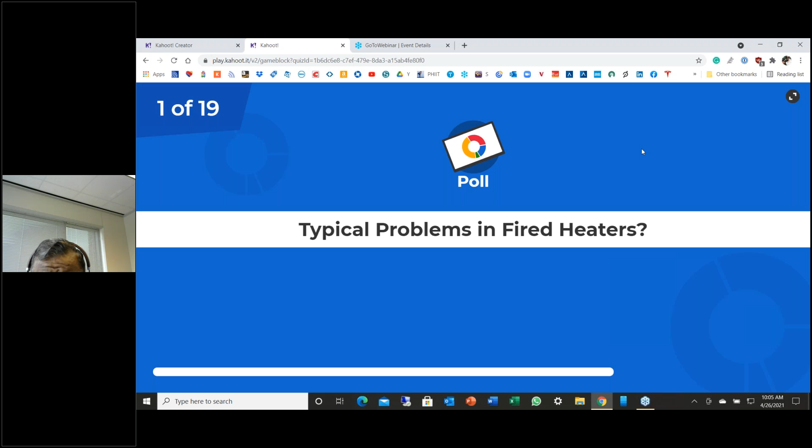So what we want to do is we want to start, and my first question is a poll question for you. What are the typical problems in fired heaters? On your phone, you can select one which you think is the most important problem or the most pressing problem, or what you have experienced in your time. You can write it down, you can click it.

I only had 4 selections available here. I think we have another slide for 4 more problems. But what we want is, let's identify the problems. Let's hear from the end users. Let's find out what they think are the problems rather than my telling these are the problems. So please, on your phone, select one of the 4 answers, and that way we will know what are the pressing problems in fired heaters.

It could be positive pressure at arch. You could be worried about high flue gas temperature in stack. I can tell you so many of my colleagues in India, because of the high fuel gas cost or high energy cost, are really worried about flue gas temperature leaving the stack, and they want to cool it down almost to ambient if it's possible. So we will discuss that as well.

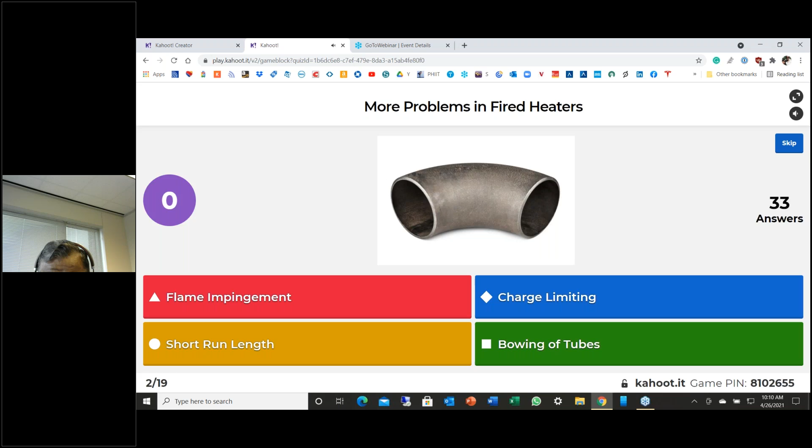So 67% think flame impingement is a big problem, and I agree very much with them, because we also feel flame impingement has been exacerbated ever since we got the low NOx burners, with double or triple the flame length. Flame impingement problems have been experienced in a number of heaters. And then short run length, that's another, I think maybe a direct relation coming from flame impingement. So thank you again, good response.

So where do we use fired heaters? Given a choice, I think process engineers won't even like to put a fired heater. I mean, they may want to use a heat exchanger or something similar. So let's find out where fired heaters are being used.

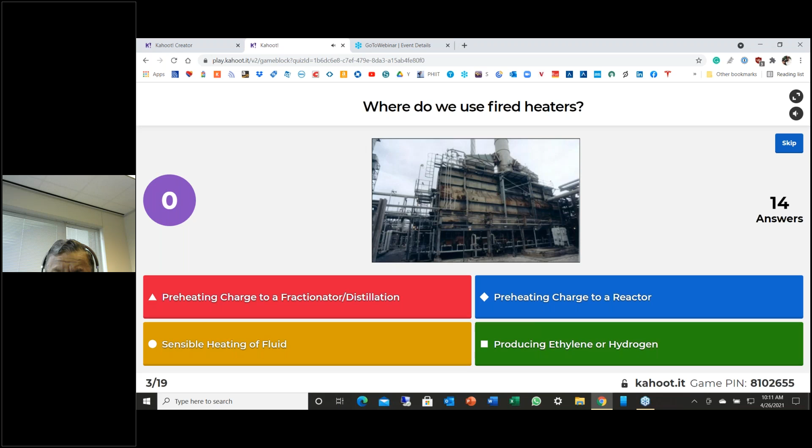About 50% of applications are in preheating charge to a distillation column, maybe like a crude column or vacuum column. Some places it could be preheating charge to a reactor like a hydrotreater or hydrocracker. Some could be sensible heating of fluid, like a hot oil heater. And then the other application is producing ethylene or hydrogen.

I'm happy there are 3 people who have ethylene applications.

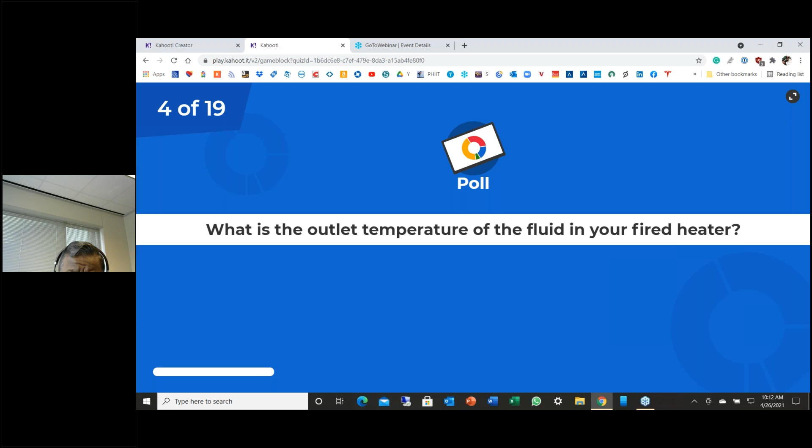If you have a fired heater, let me know what is the outlet temperature of the fluid in your fired heater. To what temperature do you heat it? It appears I've only given 30 seconds, so you need to act quick. Maybe next time I can add more time, but since we have limited time, I'll go with this.

Most heaters heat the fluid to about 600 to 800 degrees F, typically. There are some heaters, maybe coker heaters or platformer heaters, where we go up to 1000 degrees. Less than 600 are typically hot oil heaters or maybe reboilers. And the 1400 to 1600 range is in steam methane reformers or ethylene crackers - those are specialized settings. So you can see we have applications of fired heaters with different outlet temperatures.

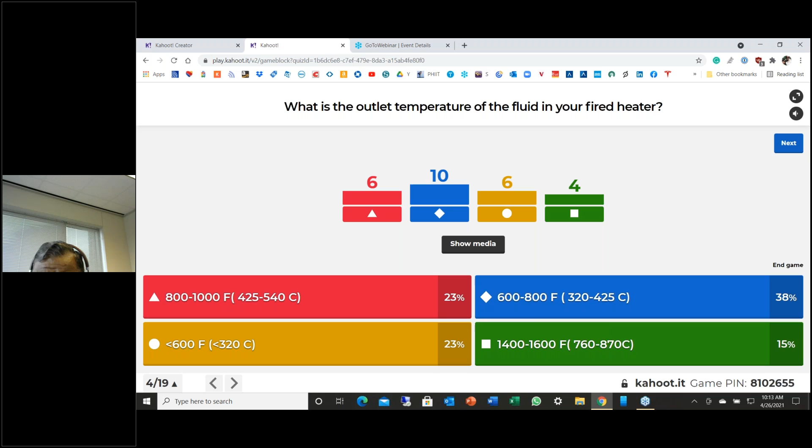So my question here is, can you achieve 900 degrees outlet fluid temperature using steam or hot oil? Is it true or false?

I think it's very important to understand that process engineers use heat exchangers as their first choice. In heat exchangers, you can have steam heating or hot oil heating. But after 600 or 700 degrees temperature, the hot oil starts coking up and the steam pressure keeps going up. To achieve 900 degrees, the fluid has to be at least about 1000 degrees so that we can have the approach. So that is one reason we find that heat exchangers cannot be used in place of fired heaters.

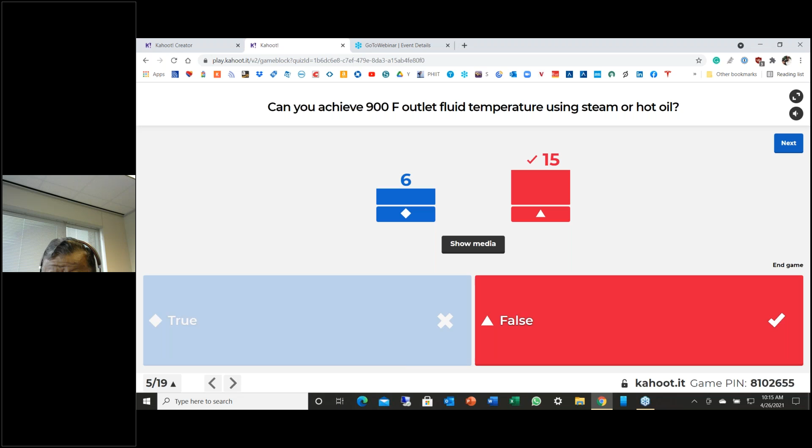So just to give you a picture on the refining industry in the US, we are in survival mode. The number of refineries has been coming down. 40 years ago, there were more than 300 refineries in this country. Today we have only 120 refineries operating. The good news is the refining capacity in the US has more or less remained steady or even gone up - that means existing refineries are being revamped every 5, 7, 10 years to increase capacity.

My guess is there are approximately 2,200 heaters in the US, out of which 90% of the heaters are natural draft. 8% of the heaters are forced draft, and only 3% of heaters have an air preheater.

This picture is very different when you go to Asia. There, because of high fuel gas cost, 90% of heaters are balanced draft, or 85% of heaters are balanced draft with an air preheating system, because the fuel gas cost is very, very high. Average size of a heater in the industry is about 72 million BTUs. The forced draft or balanced draft heaters tend to be bigger, at about 110 million BTUs. So that is the picture.

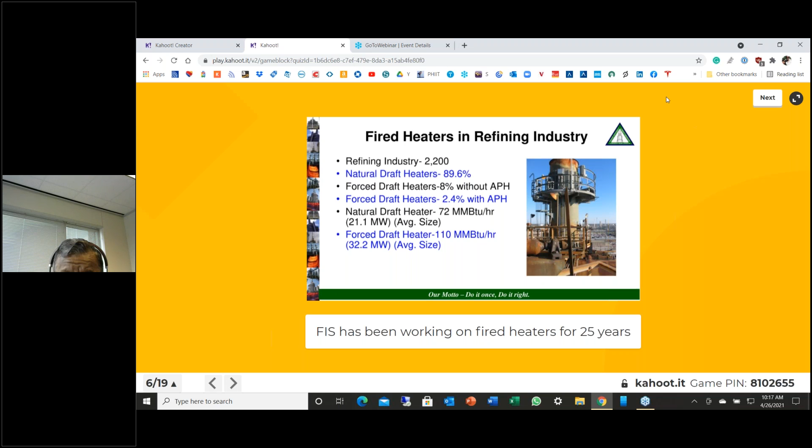Fired heaters are nothing but large heat exchangers. They are used for high temperature heat transfer. The energy for heat transfer comes from the combustion of fuel, and radiation heat transfer plays a very significant role. We will talk about many variations of fired heaters: single fired, double fired, top supported, bottom supported, vertical and horizontal tubes. So we will talk all about that.

So here's a guess for you to take. What is the temperature of the flames? I'm looking for the adiabatic temperature before it gives out the heat.

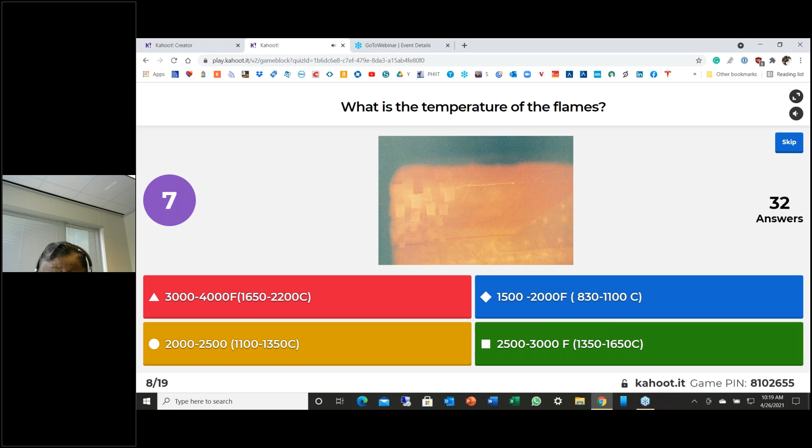So some people think, most people think the flame temperature is in the range of 1500 to 2000, or 2000 to 2500, or 2500 to 3000. The real temperature of the flame before it gives out the heat is in the range of 3000 to 4000 degrees F, or 1650 to 2200 degrees C. So you can see the flames are really, really hot.

If you look at methane, ethane, they typically tend to burn around 3200 degrees. If you talk about carbon monoxide, hydrogen, ethylene, propylene, acetylene, you will see their range in the 4000 degrees F range. So these are the adiabatic flame temperatures we are talking about.

So flames are really, really hot, and that is why we are able to heat up to 1500 or 1600 degrees F in ethylene crackers, or 1400 to 1500 degrees F in steam reformers. Flames play an important role in radiation heat transfer.

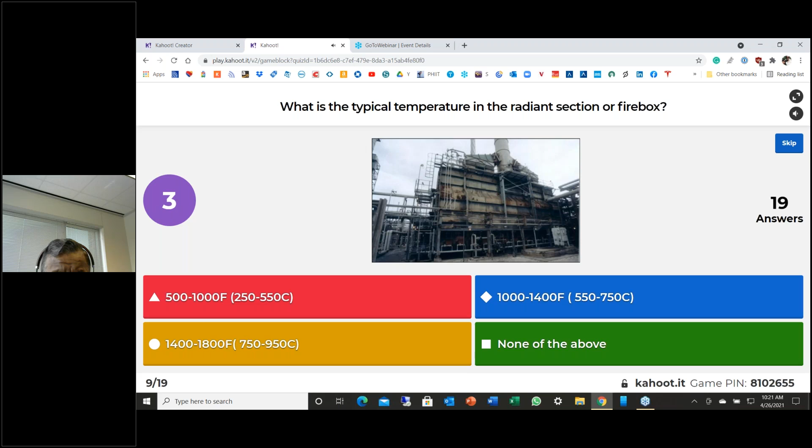The correct answer is around 750 to 950 degrees centigrade, and most of you got it right, or 1400 to 1800 degrees F. That's the right temperature. Below this temperature, the radiant heat transfer is not very effective. We will talk more about it, but anything below 1400, the Stefan-Boltzmann equation, or the radiant heat transfer, is not very effective. So that's where we kind of keep it around 1400 to 1800 to get our heat transfer.

So what is the flue gas temperature leaving your stack?

I think maybe we need more time for our participants. That's what it appears to me. Or maybe they have some slow internet connection.

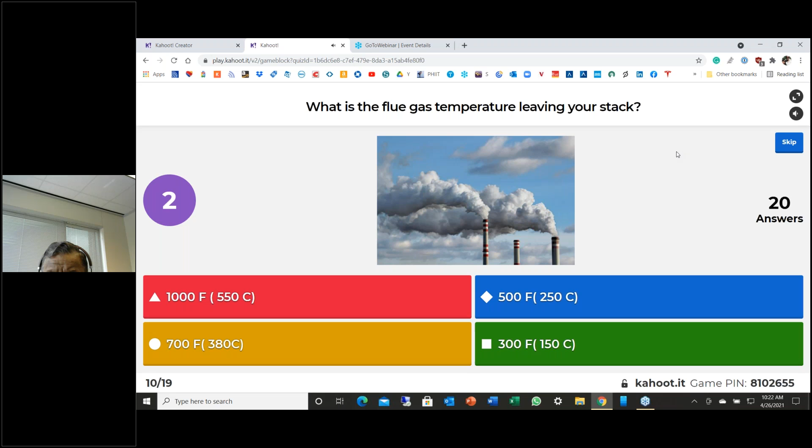I think the lowest temperature we have is 150 degrees centigrade, or 300 degrees F. I think most people in India must have been targeting 300 degrees. Then there are some people with even 500 degrees stack temperature, and some with even 1000 degrees stack temperature. So 1000 degrees stack temperature, I would say, is very, very high, or even 700 is high, and we can go for improvement. But as you can see, most of the temperatures are in the range of 300 to 500 degrees, 80%, or 150 to 250 degrees centigrade.

So as I said, typical temperature of flame for hydrocarbons is about 3000 to 3200. Temperature of flue gas leaving the radiant section, 1400 to 1600. Temperature of flue gas leaving the convection section, 600 to 800 degrees. And temperature of flue gas leaving the air preheater is around 300 to 400 degrees F, or 150 to 250 degrees centigrade.

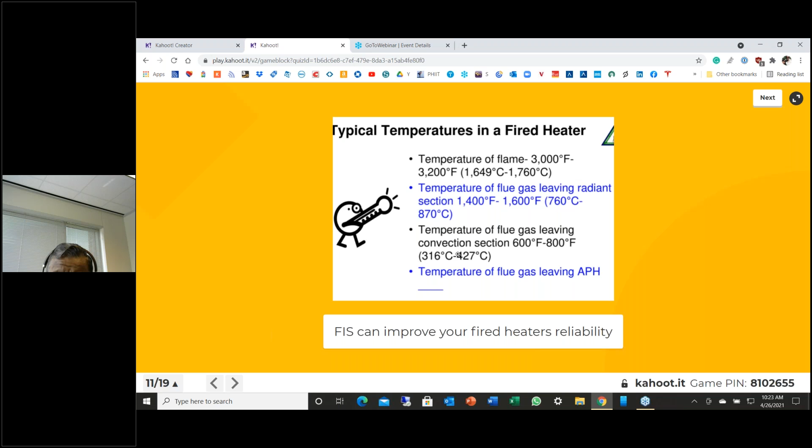Now we want to talk about what type of fluid heating is occurring in your fired heater. Is it sensible heating? Is it latent heat? Is it sensible heat and latent heat? Or is it sensible heat, latent heat, and reaction? We can have different types of heating taking place in fired heaters.

If you have a hot oil heater, it is mostly sensible heating. If you have a reboiler, it is mostly latent heating. Sensible heating and latent heating is in most of the heaters, crude heaters, vacuum heaters, where we have both sensible and latent heat. And then we have reaction furnaces where we have all types, sensible heating, latent heating, and reaction also taking place. So you can see we can use fired heaters for many applications.

As you can see, we have some people with reaction furnaces, some with sensible heating, but most of the furnaces have sensible heating and latent heating. So that's typically how it is.

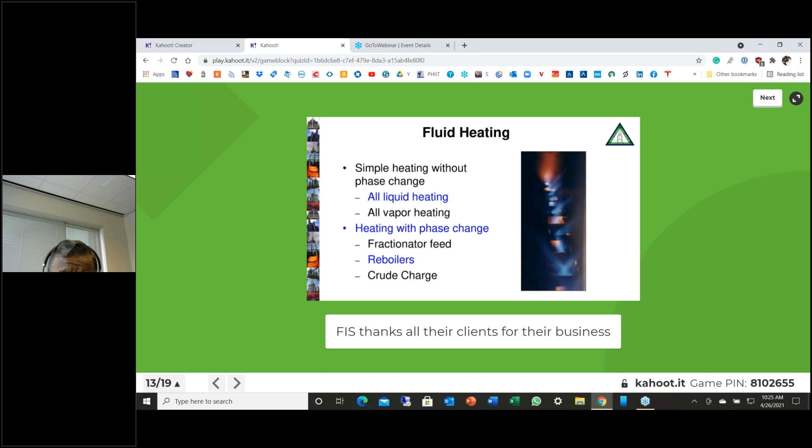Or we have heating with phase change, meaning liquid coming in, but liquid plus vapor going out. In that category we have fractionator feed, reboilers, crude charge heaters. So that's typically the type of applications.

And these are the different heaters used in the industry: column reboilers, reactor feed heaters, hot oil heaters, and different heaters in the industry like hydrocracker and hydrotreater heaters. So all these heaters are used in the industry.

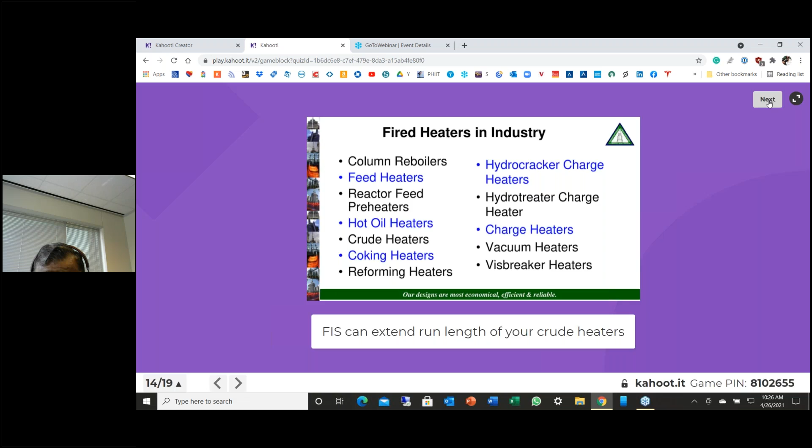So let's talk about what is heat. We have been talking about heat transfer, fired heaters. So let us understand what is heat.

I think almost everybody got it right. Heat is a form of energy. Energy can neither be created nor destroyed, but it can be transferred.

Let's talk about units of heat. What are the units of heat that we measure?

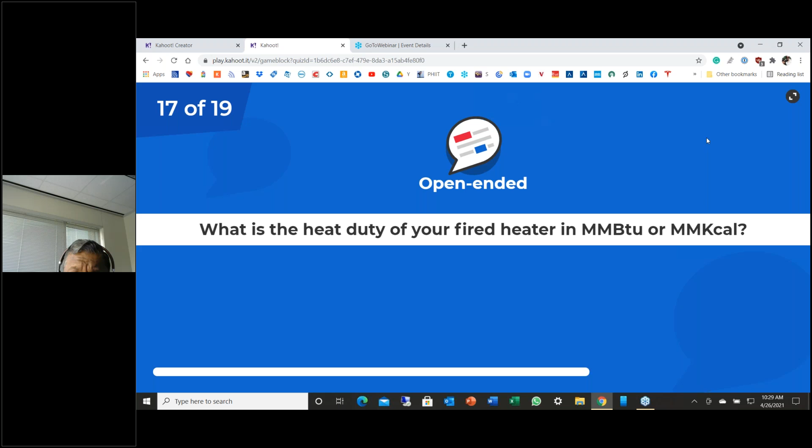So this one is a little different actually. I'm asking you to type your answer. You can just type a number: what is the heat duty of your fired heater in million BTU or million kilocal? If you want to put units, it's fine, if you don't have space or this thing, but we need to know what is the size of your fired heater.

The heaters can range anywhere between 1 million BTU to 1,000 million BTUs. The largest heater which we have worked on has been around 1,000 million BTUs, or 250 million kilocalories. We have worked on small heaters also, but some of my friends have really large heaters.

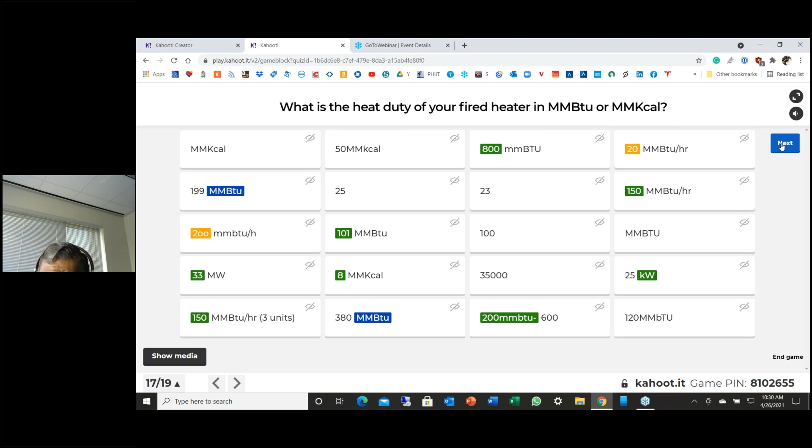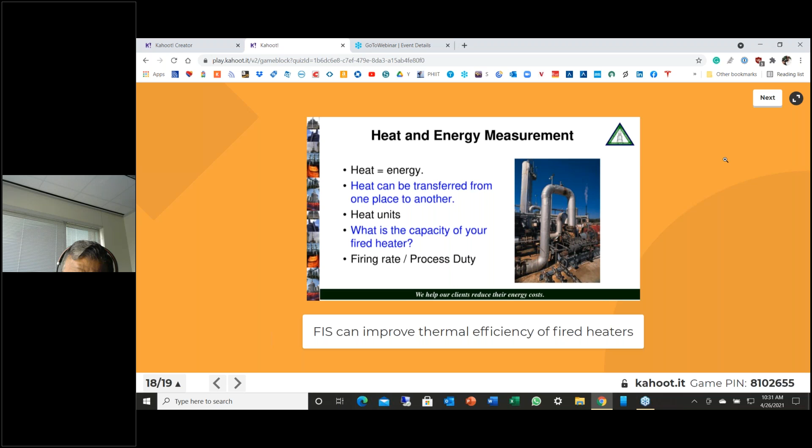So heat is a form of energy. Heat can be transferred from one place to another. We already talked about heat units, and we already talked about what is the capacity of your fired heaters. We will talk later about firing duty, firing rate, and process duty. That's also very important because it relates to efficiency. So we'll talk about that.

If you are an owner operator, the objective is lowest operating cost, minimum downtime, and proper operation. So that's typically what we want to achieve in our fired heaters. We want maximum efficiency, minimum emissions, minimum greenhouse gases, high run lengths. We want our heater to run forever, maybe 6 years or even 8 years with no repairs, and most importantly, safe operation. We don't want to have any accident. We want everybody to be safe day in, day out.

But we want to talk about different types of heaters, components of heaters, and how the heaters started actually. As all of you know, the refining industry is a little more than 120 years old. That's what it is. And when we started...

When we started the refining industry, the heaters used to be in an altogether different shape. We used to have shell type heaters or tank type heaters, and they were a batch process. So they would have multiple heaters, and as they would coke up, they would shut it down, clean it up, and then move on.

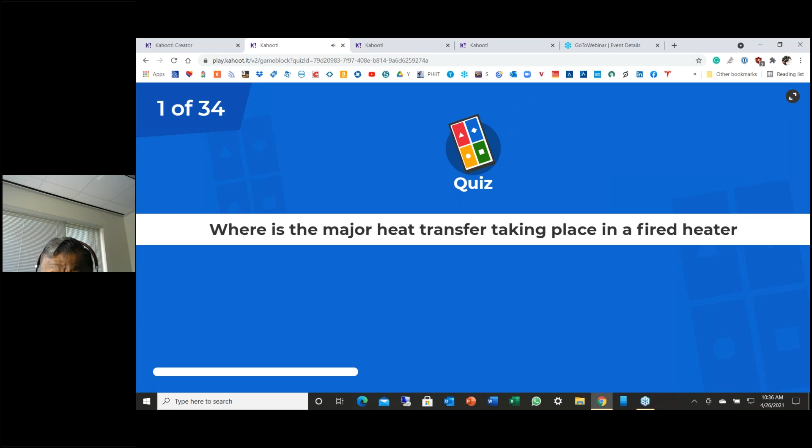So where is the major heat transfer taking place in a fired heater? Okay, almost 3/4 of people got it right. The radiant section is where most of the heat transfer takes place in a fired heater. Almost 60 to 80% of the heat in present day fired heaters is absorbed or transferred in the radiant section. The convection section is important, but it does only 20 to 40% at most. That's typically the ratio where heat is transferred.

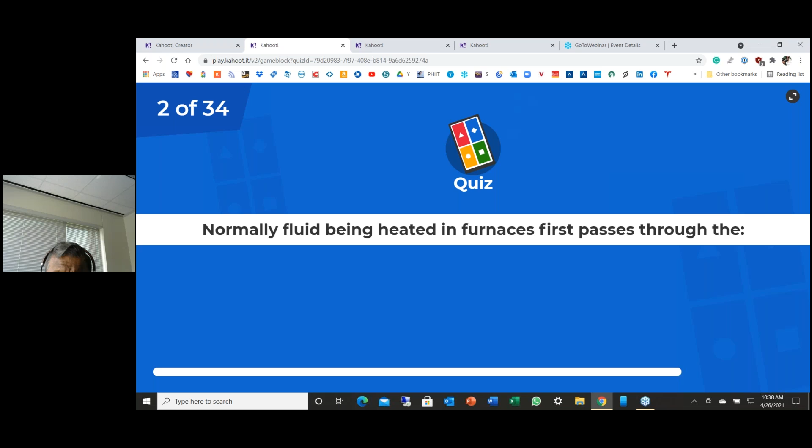Where does the fluid which is heating in the furnace first enter? Does it enter the shock bank, the radiant section, convection section, or burners? Most of you got it right. The fluid enters the heater in the convection section, because the fluid is coldest when entering the heater. This allows the most efficient heat transfer in the convection section by lowering the flue gas to within 50°F of the inlet temperature. So for efficiency reasons, to maximize the efficiency of the fired heater, the fluid enters the furnace in the convection section and then goes to the radiant section.

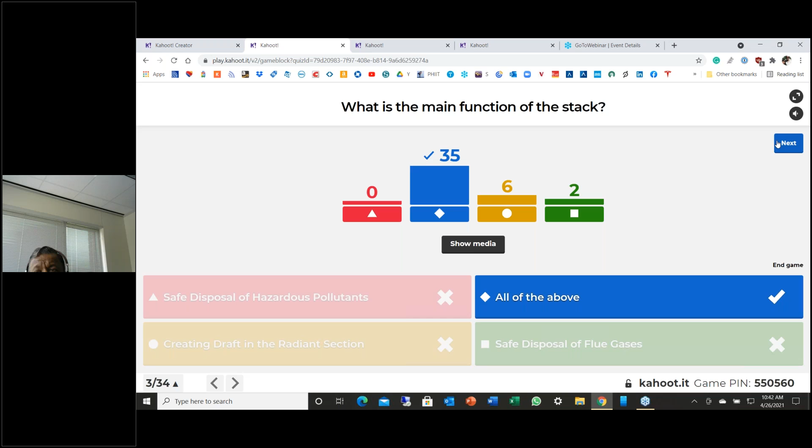So the three main components in fired heaters are the radiant section, convection section, and stack. There are some heaters where we don't have a convection section and just have the radiant section and stack; these are mostly used for startup services in small heaters.

The radiant section, as I said, is the most important, and we can divide it into three components: the firebox, which is the steel casing, refractory, and tube supports; the radiant coil, consisting of tubes and bends where heat transfer takes place; and the burners. Burners are on the floor or other places, but they provide the heat, or basically provide the flame for heat transfer. So those are the three major components in the radiant section.

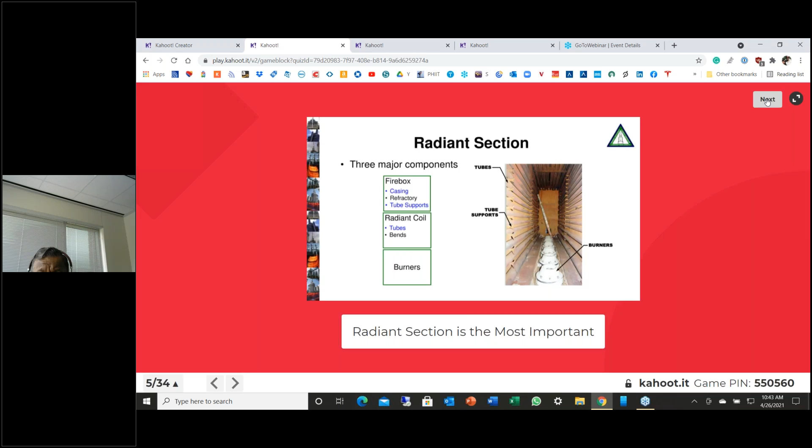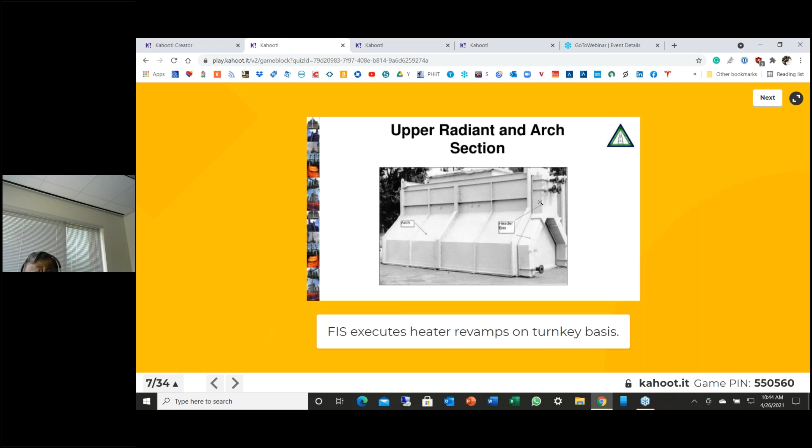This is a cabin heater, a horizontal tube cabin heater, showing the upper radiant section and arch section. The arch is basically the roof of the radiant section, and then we have the convection section. You can see the header boxes of the convection and radiant sections here. That's basically how the upper section and radiant section look.

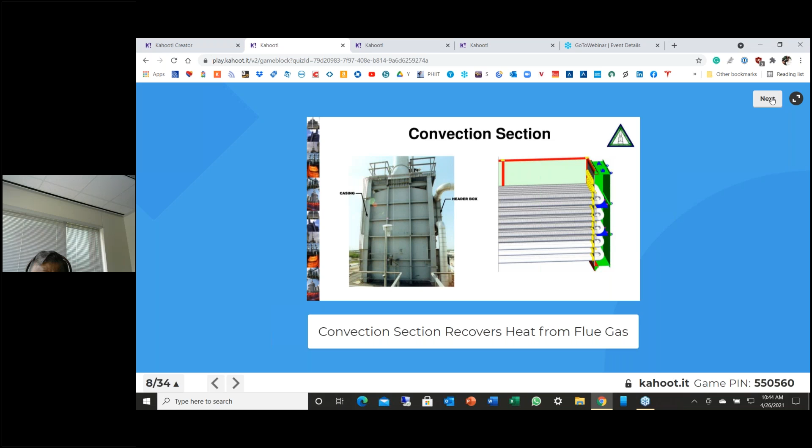Now we're talking about the convection section. Convection sections in fired heaters generally have the same shape, with tubes arranged horizontally in a triangular pitch at 2D spacing most of the time. The first three rows are bare tubes, and then we have finned or studded tubes for better heat transfer. That's typically how the convection section is designed.

So the convection section can consist of bare tubes in the bottom, you can see over here. Then we have fin tubes and studded tubes. And we have refractory baffles on both sides to prevent flue gas bypassing. That's typically how the convection sections are constructed.

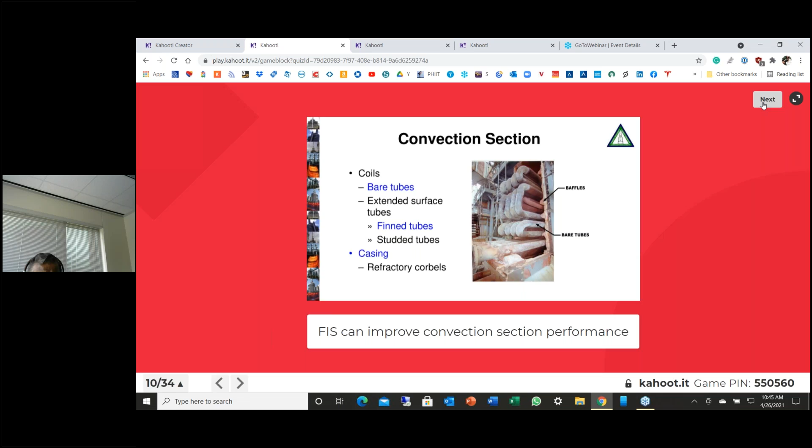We are showing fin tubes and studded tubes. Fin tubes are used in gas firing, studded tubes are used in oil firing. So that's basically the difference. Most of the heaters these days, since we are firing gas only, have fin tubes.

And then we have intermediate tube sheets, because horizontal tubes require supports every 35 diameters. So we have these high alloy tube sheets which support the convection section tubes every 35 diameters. That's typically how the construction is.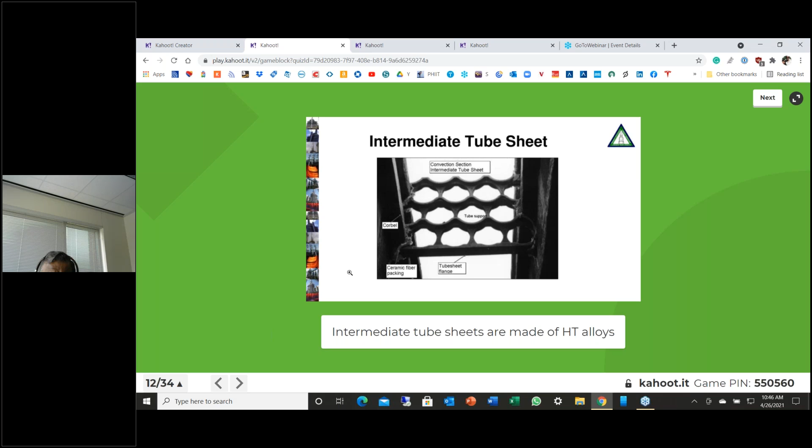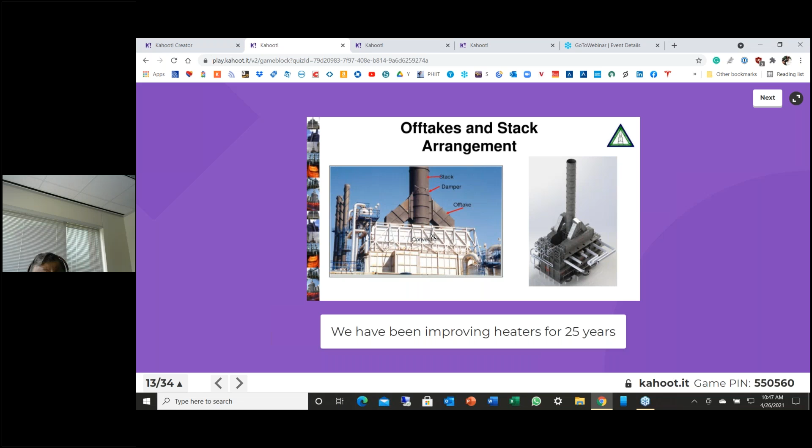And then once the heat is recovered, we have the flue gas offtakes, you can see over here, and then you can see the stack, which is used for disposing the flue gas. We also have a damper here. So this is the convection section, this is the radiant section, and that's the third component, basically the stack and the offtakes.

So as we said, stacks have an important function of creating draft. And you can see in this picture, ladders, platforms, helical strakes for keeping the stack structurally stable. That's typically what we have. And then we sometimes have a stack tip with a reduced diameter for higher flue gas velocity. So that's basically how the stacks are functioning.

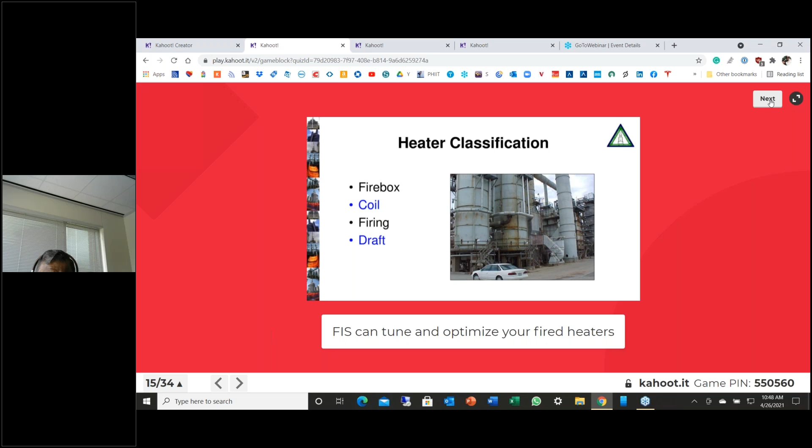So let's talk about different types of heaters. The heaters can be classified in a number of ways. We can classify it as per firebox, as per the coil layout, how the firing is, and how the draft is provided, so they basically depend on different types. We have two configurations: vertical cylindrical and box heaters. These are the two configurations we normally have.

So I want to find out what is the orientation of your radiant coil. Is it vertical, horizontal, helical, or none of these?

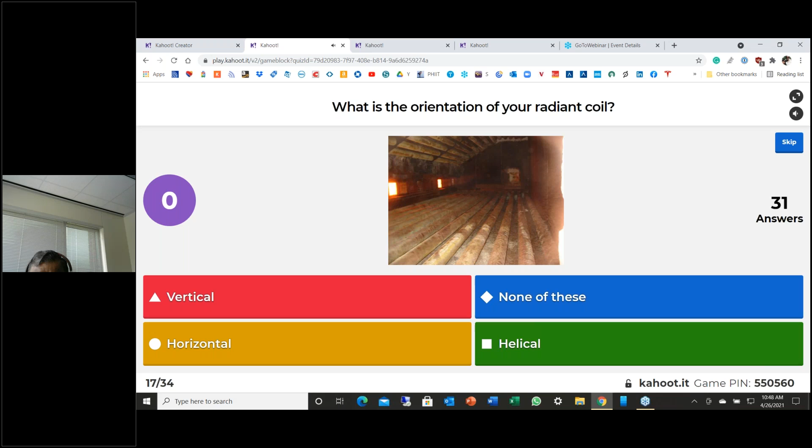So most of the heaters, or the majority of you, have answered vertical coils, 60%, and 30% have answered horizontal. Helical coils are used in small heaters. Horizontal coils were historically provided in all the old heaters. All the old heaters used to have horizontal coils.

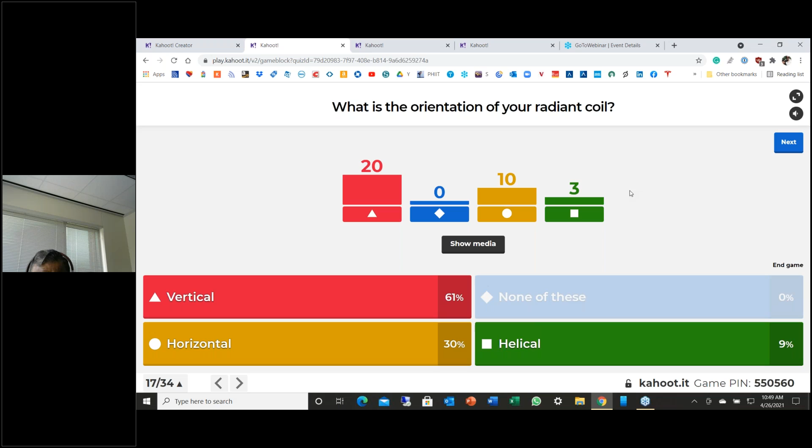And slowly the industry has been moving towards vertical coils, because vertical coils are easier to support. You can support them from the top, and you don't need to have any intermediate support. Vertical tubes remain straight also, so because of that vertical tubes are preferred nowadays. As you can see, 61% of people are saying so. This is the horizontal tube heater, cabin heater, and this is a vertical tube heater. You can see over here, vertical tube heater. Vertical cylindrical heaters are generally having vertical tubes.

So I want to ask you, how are your radiant tubes supported? Are they supported from horizontal supports if they have horizontal orientation? If you have vertical, are they supported from the top or from the bottom? Or maybe you don't have any supports. Doesn't look like that to be the case, but that could be another option here.

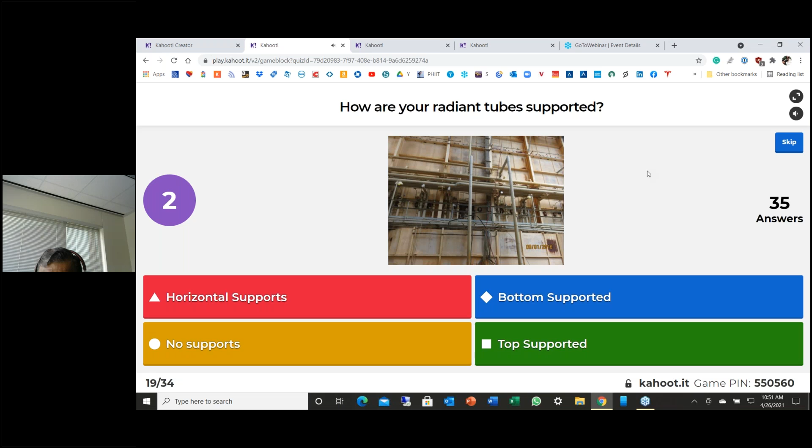As you can see, top support in vertical heaters is most common. Bottom support is used in smaller heaters, and horizontal supports are used in horizontal tube heaters. So of course, nobody has no supports, everybody has some type of supports.

And along with supports, we have guides. So typically, if it's top supported, we will have bottom guided. If we have bottom supported, it will be top guided. And sometimes intermediate guides are also there. On horizontal supports, we don't need any guides, but we do need some locking bars for preventing the jumping of tubes. That is provided in reboiler services or vaporizing services. That's typically how it works.

Two common configurations: vertical cylindrical heater is a very common configuration, and horizontal tube cabin heater is another common configuration. Most heaters today are built in these two configurations, although if you look at a 50, 70, or 100-year-old heater, you will see all sorts of shapes and sizes which were built by the refiners at that time.

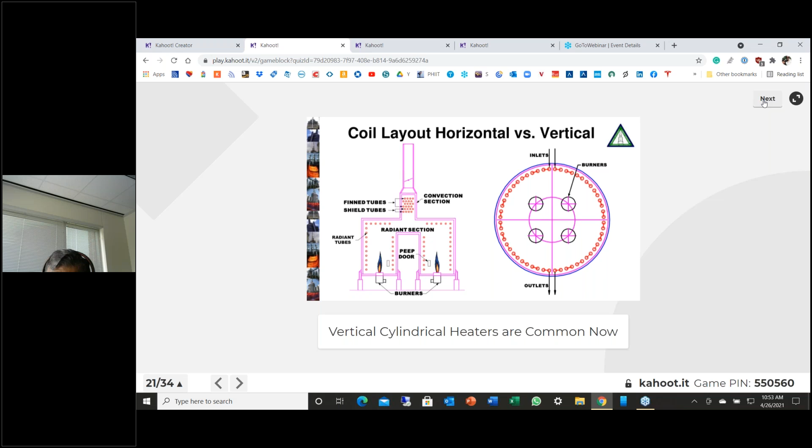So here is a question for you: where are your burners located? Are they on the roof, floor, sidewall, or end walls?

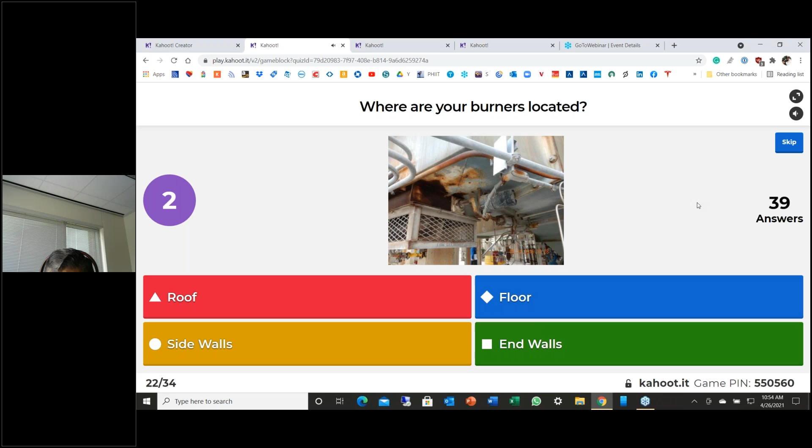Typically burners are on the roof in steam methane reformers. Most heaters have floor firing, and that is the most common these days. In the old days, old heaters would have burners on the end, firing horizontally, or some heaters like steam methane reformers or even cracking heaters—ethylene cracking heaters—have burners on the side walls. Roof firing is only for steam methane reformers, firing down. Well, thank you for your feedback.

One very important thing is uniform heat distribution, and the burner's location and number are main causes of how the heat distribution is created. So burner layout could be floor firing, end wall firing, side wall firing. There is another firing which is terrace wall firing, promoted by Foster Wheeler for steam methane reformers. It's also a very good way of firing.

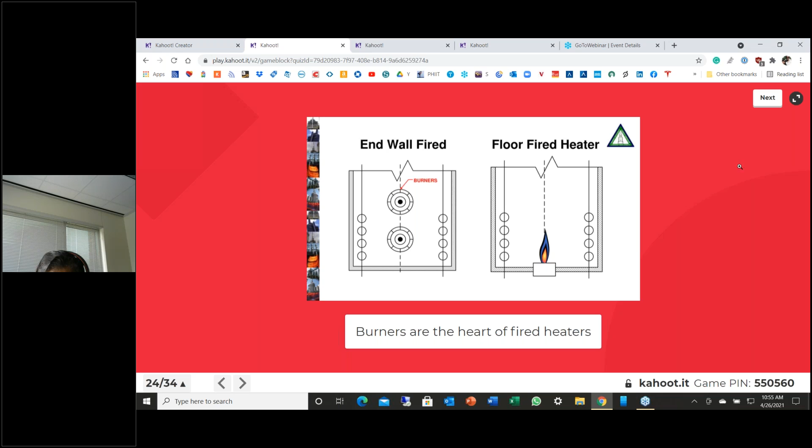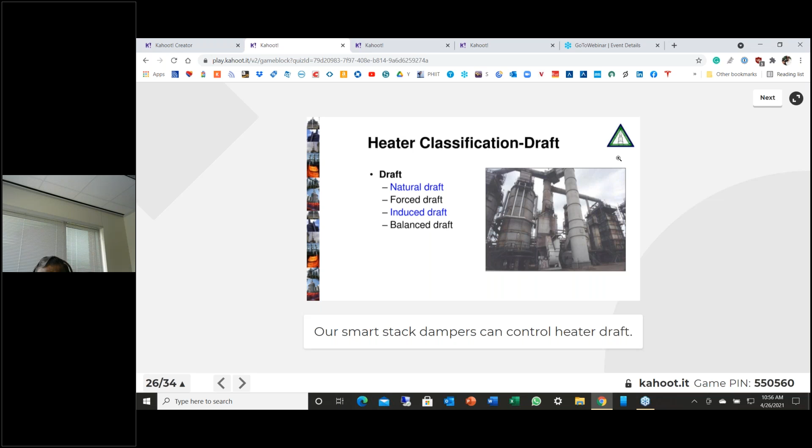Another way we can classify the heaters is by draft—whether you have a natural draft heater, a forced draft heater, induced draft, or balanced draft. Two drafts are very common, natural draft and balanced draft, in the refining industry. That's typically the most common configurations of heaters.

So we want to find out from you what type of draft system you have on your fired heater—induced draft or forced draft. Forced draft firing means you have an FD fan only. Induced draft firing means you have an ID fan only. Balanced draft firing means you have both fans, FD and ID, and most probably an air preheater. Natural draft firing means no fans. That's typically how you can configure it.

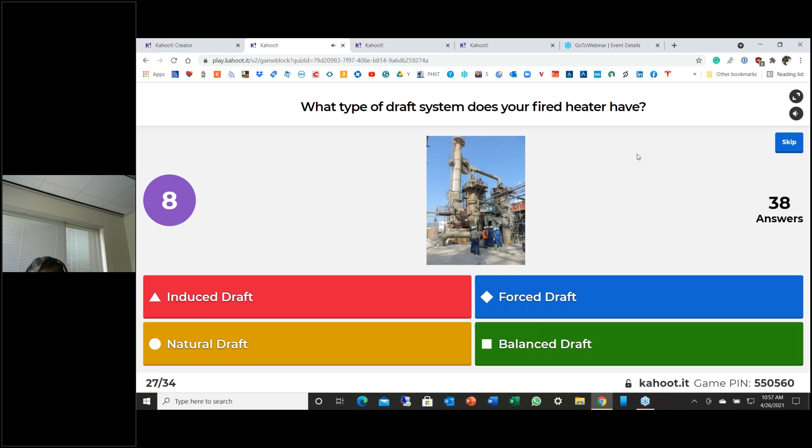Most furnaces, or the majority, answered natural draft. Some people have balanced draft, some have forced draft, which is unusual, but anything is possible. I really like forced draft furnaces because they have shorter flames. And then we have induced draft furnaces. Thank you for your feedback.

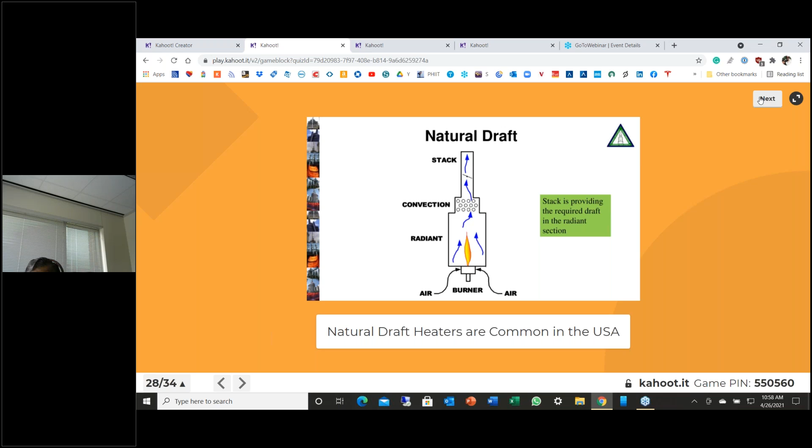Natural draft heaters: the stack creates a draft, no fans are required, and it's the most common configuration in refineries in the USA. They are the least expensive, most reliable, but also least efficient. So when we are talking of greenhouse gas emissions, that gives us a lot of potential to improve the efficiency of these natural draft furnaces, at least by about 10%, if not more, to reduce greenhouse gas emissions.

Balanced draft, as I said, is the one where we have the air preheater. We have an FD fan supplying cold air to the air preheater, and it's preheated there, then hot air goes to the burners, and hot flue gas goes to the air preheater. Heat is recovered, and through an ID fan, the flue gases are sent back to the stack. This is a very common configuration in refineries, especially in India and in Asia, where fuel gas prices are very high. These furnaces are about 90-95% efficient.

So what type of heater do you have? Do you have a horizontal tube cabin heater? A vertical cylindrical heater? A twin cell heater, or some other type?

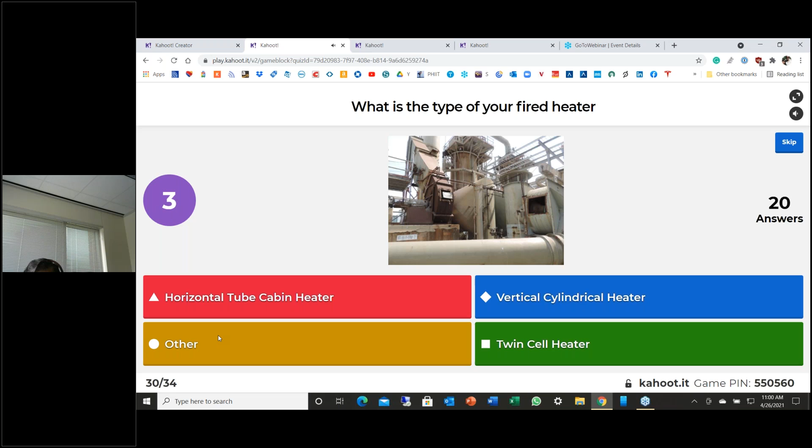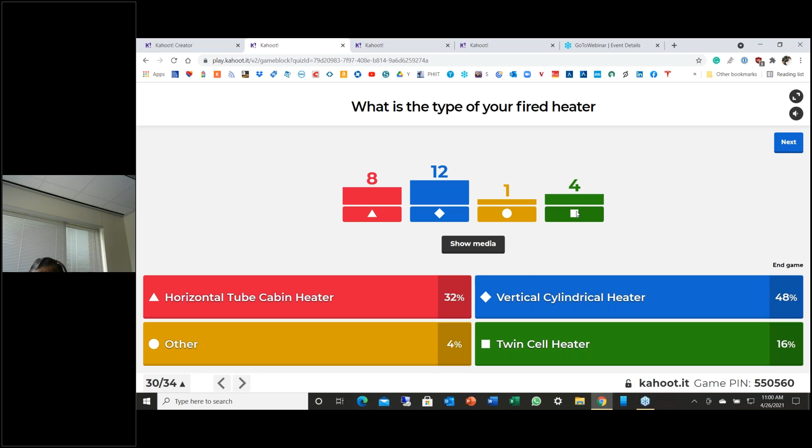Most people have either vertical cylindrical heaters or horizontal tube cabin heaters, and some have twin cell heaters. So it's all split up.

Now I want to talk about some common types of heaters. A vertical cylindrical heater with horizontal convection section is very popular, considered the workhorse of the industry, with a lot of advantages. Vertical cylindrical heaters became popular in the 1950s - low plot space, economical, and we can have any number of passes. The convection section is very compact, and vertical tubes can go up to 60-65 feet.

Heaters are built into this configuration. We can have heaters up to 150 or 200 million BTU by combining two radiant cells, but generally 70 to 75 is a pretty good number for that.

Horizontal tube cabin heaters are also very popular. As I said, old heaters all used to be horizontal tubes. We can have it with a sloping arch or with a flat arch - those are the two variations. When we have a flat arch, we call it a box heater. When we have a sloping arch, we call it a cabin heater. Not much difference there.

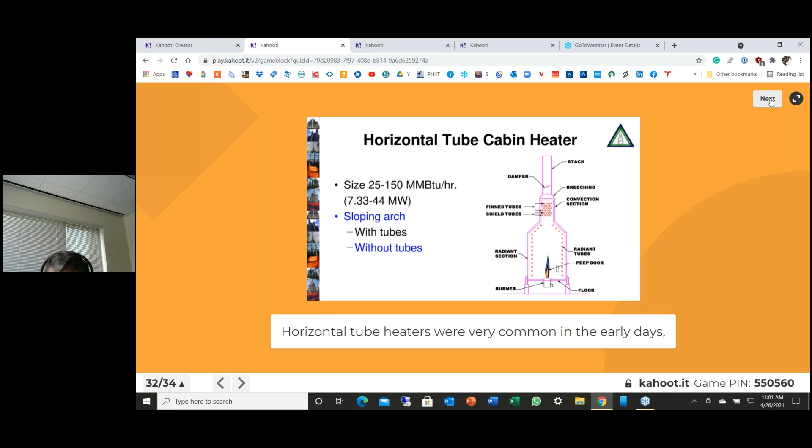That's again a common type of configuration.

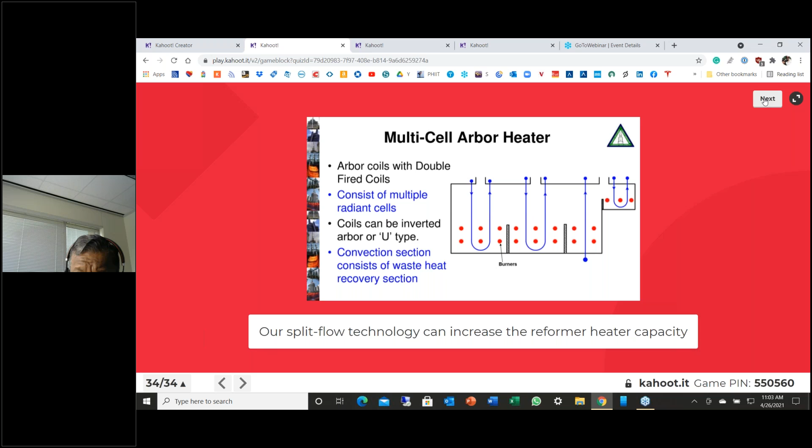We will be talking about combustion. Combustion is one unit operation which happens only in heaters and boilers, not in any other equipment in the refinery. That's what differentiates fired heaters from heat exchangers or any other equipment - a very different type of unit operation. Combustion, in my opinion, is one of the most important operations taking place in fired heaters. Combustion is always working actually.

We are also tight on time, so we'll start and try to complete this. We'll talk about combustion and efficiency today in the last session of this webinar.

Does a combustion reaction happen in liquid phase, solid phase, or gas phase?

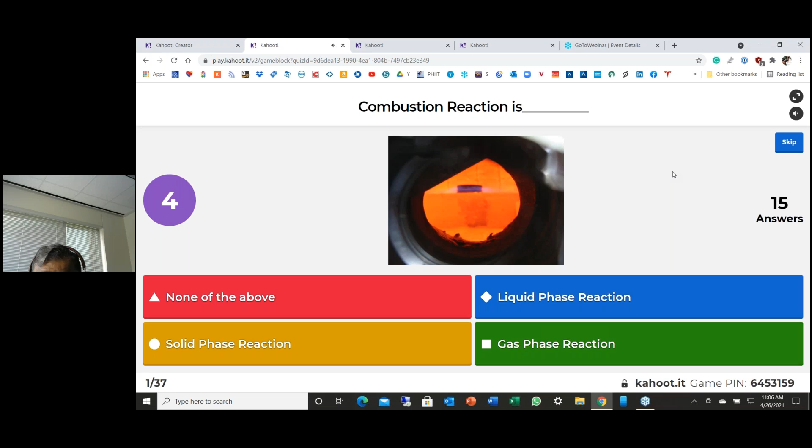Most of you got it right - combustion reaction happens in gas phase. So even if you are burning liquid fuels or solid fuels, the combustion reaction happens in gas phase. Both reactants need to be in the gas phase for combustion to occur. Thank you.

Combustion requires the following: oxygen, combustible fuel, a source of heat energy, or all of the above.

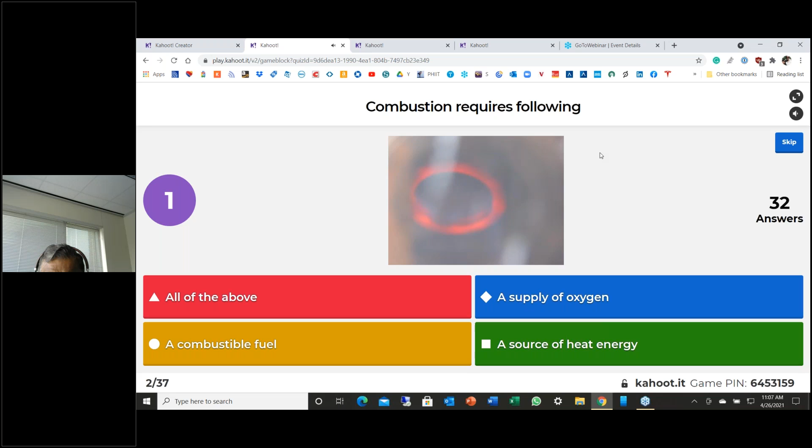Most of you got it right. We need a combustible fuel, a source of oxygen, and a source of heat to start the combustion. So all of the above is the correct answer - without this, it will not work.

Okay, so this was supposed to be at the end, but maybe it got mixed up - I don't know, it became random. So anyway.

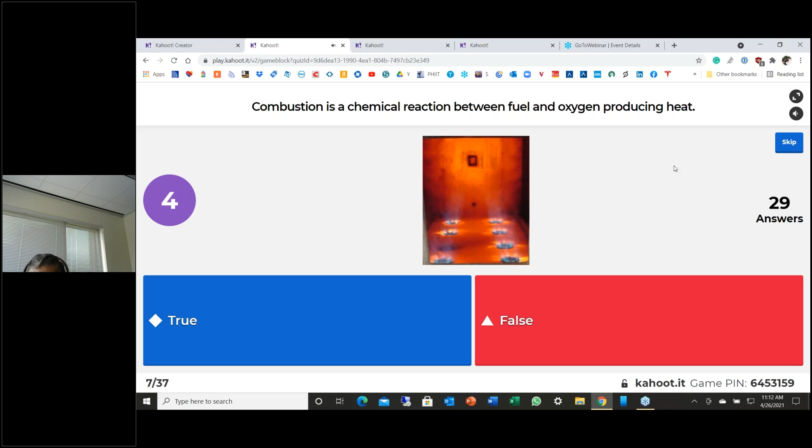Thank you, everybody got it right. So you are all combustion engineers. What is stored in fuel? Is it mechanical energy, chemical energy, electrical energy, or thermal energy?

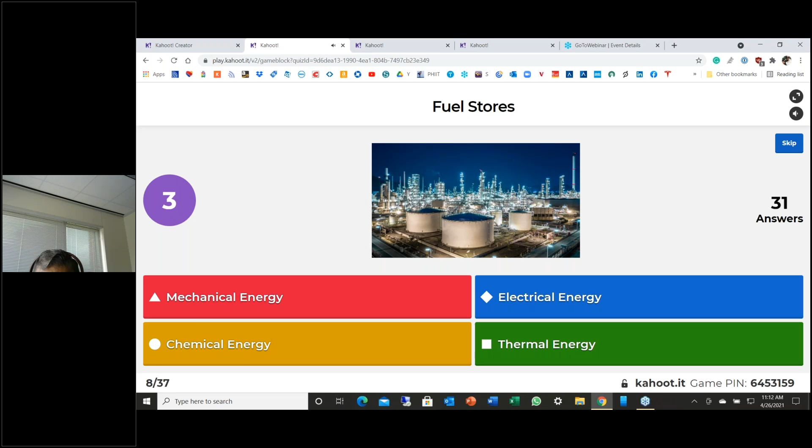So I think we already discussed it. It is the chemical energy which is stored in the fuel, and by process of combustion, we are transferring the chemical energy into thermal energy.

What are the three main ingredients for combustion? What do we need for combustion? Thank you, everybody got it right.

Fuel, oxygen, and heat. These are the three things we need to start the combustion. But once we have the heat, then the combustion is self-sustaining.

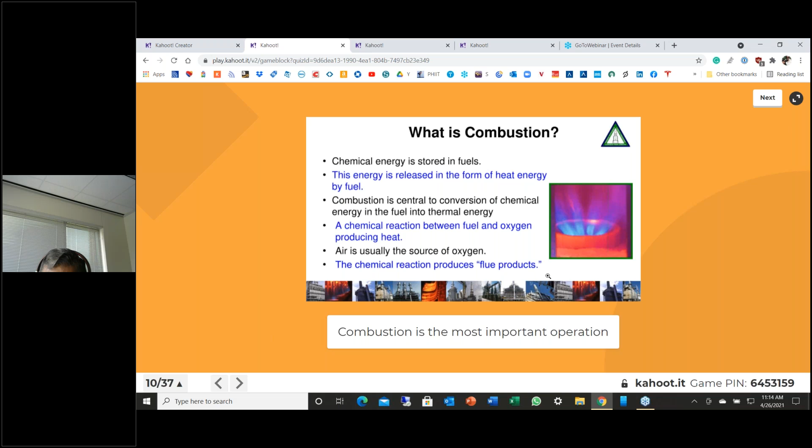So chemical energy is stored in fuel. This energy is released in the form of thermal energy by fuel, and combustion is central to conversion of chemical energy into thermal energy. The chemical reaction is taking place between fuel and oxygen. Oxygen, we normally get it from air, and the products of combustion are called flue gases. So fuel and air combust to produce flue gases, and that's the combustion.

So combustion has several properties, you can say. First of all, it is a spontaneous reaction. It happens very, very fast.

Also, it's an irreversible exothermic reaction, because once it starts, you cannot take it back. It has to keep on going. The reaction time is normally in milliseconds, especially for the gas components. It happens very fast.

And fuel has three major components: carbon, hydrogen, and sulfur. The first two are desirable components, and the third one is undesirable. It happens only in small amounts, but it still causes us a lot of pain.

And oxygen, we are lucky to get free oxygen from air. So we are not paying for the oxygen.

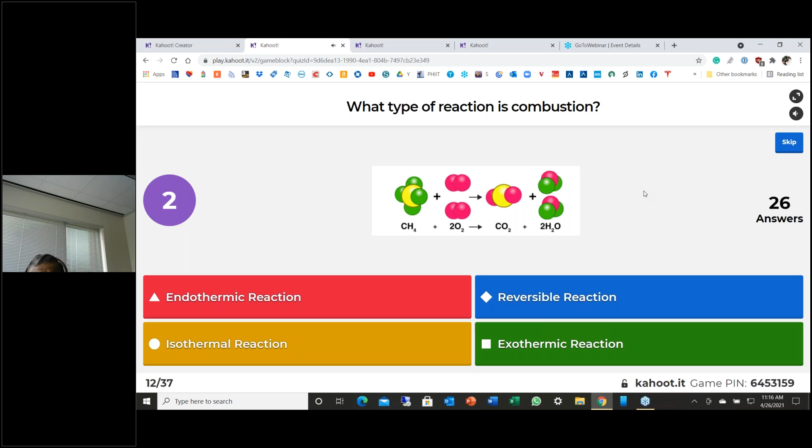What type of reaction is it - I think we already had it, but anyway. Almost everybody got it right. Exothermic.

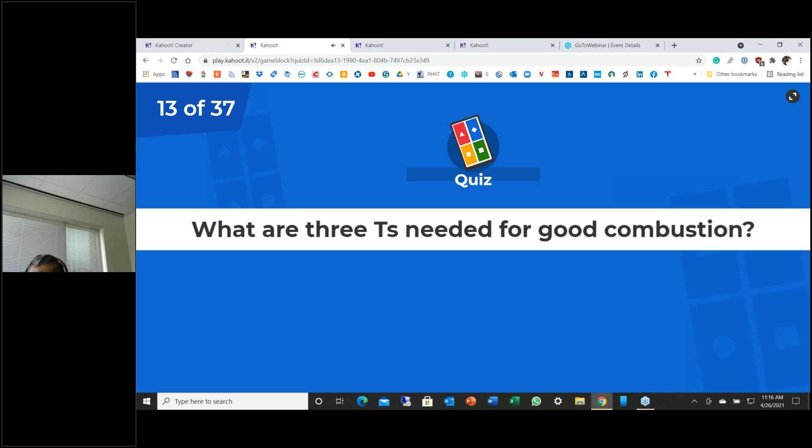What are the 3 T's needed for good combustion? I think it should be pretty clear. The only option with 3 T's is time, temperature, and turbulence. We need to have good mixing, we need to have right temperature, and then we need to have good timing for mixing. Thank you.

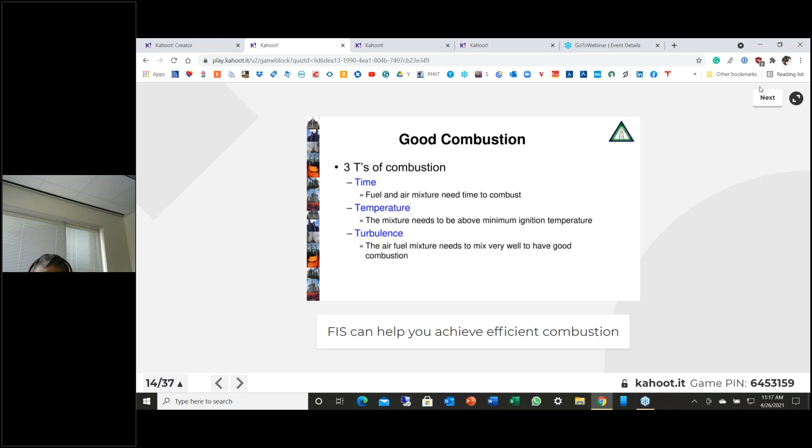So the 3 T's of combustion, as we call it, is fuel and air mixture needs time to combust. Temperature - that mixture needs to be above the minimum ignition temperature. And turbulence - we need to mix very well. Every fuel gas molecule needs to find the oxygen molecule to have good combustion. So mixing is very, very important in combustion.

So here we are talking about minimum ignition temperature. As we said, we need a minimum ignition temperature for any fuel to burn, and that is why we need a source of heat. Now, in most of the burners, we have a pilot burner or an ignition torch acting as a source of heat. That's how we supply it.

So we need that. Now, another thing which we need to talk about is the flammability limits, because if you just have fuel and air, it is not necessary that they will burn. They need to be in the right proportion. And that proportion - the lower limit is known as LEL and the upper limit is known as UEL, upper explosive limit.

So as long as the fuel composition or fuel percentage is between the LEL and UEL, you will have the combustion. If it's below LEL, it will not combust. If it's above UEL, it will not combust. And those of you who are in the operating plants will see how it works out with an explosive meter.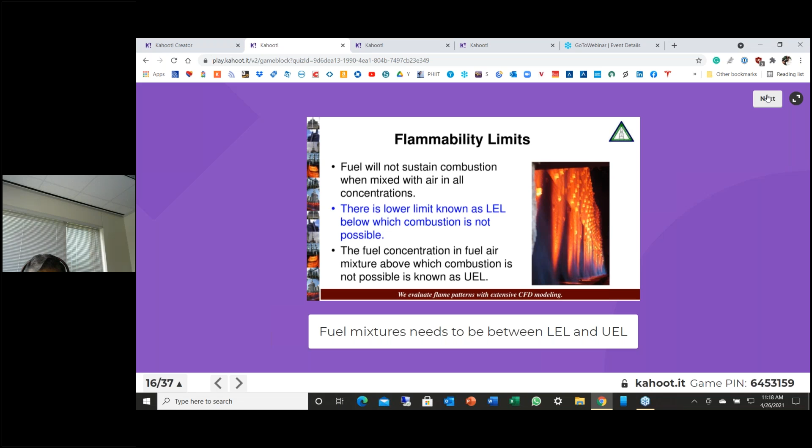So these are the flammability limits for air. The only thing I want to point out in this table is number 1, hydrogen. We are all talking of burning hydrogen, but hydrogen has the widest range of flammability, from 4 to 74%. All the other gases are 5 to 15, 2 to 36, a very narrow range for burning, so those are much safer to handle. Hydrogen has a flammability limit from 4 to 74%, so it does require special handling.

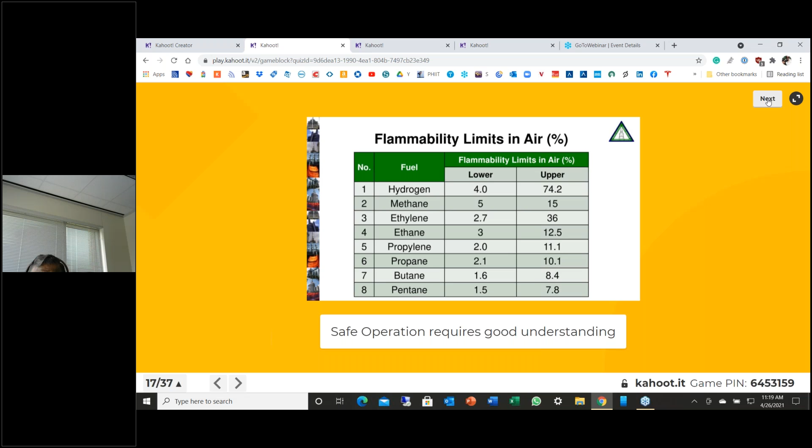This should be an easy one. How much oxygen percentage by volume is in air?

If most of you got it right, 21%. So combustion air is 21% oxygen and 79% nitrogen. Now, nitrogen does not take part in the chemical reaction, it is like an inert. It enters the heater at 60 degrees and leaves the stack at 300, 400, 500, contributing to the heat loss. So our option is minimizing combustion air so that we can reduce the nitrogen volume. That's how we get our efficiency in the heater.

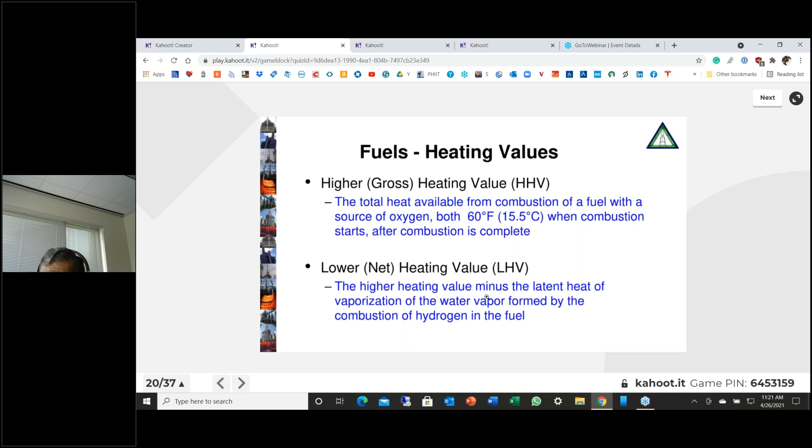Already talked about, the fuels have 2 types of heating values. Higher heating value is called HHV, and that is the heat released from the combustion of a fuel. When the combustion starts, combustion is complete, and we condense the water vapor into liquid - that is the higher heating value. Lower heating value is when we have the water vapor in the vapor phase and it's not included. So basically that's the difference between higher heating value and lower heating value.

So this is a little trick question. I don't know if you know, but what is the lower heating value of methane? If you can guess, that will be really good.

Methane is a very clean fuel, it is my favorite fuel. 95% of natural gas is pure methane. Methane also burns the coolest, so I really like it.

Well, the correct answer is 900 BTU per cubic feet. I think some of you put 1,000, some of you put 1,100, which was very close. So that's the heating value of methane.

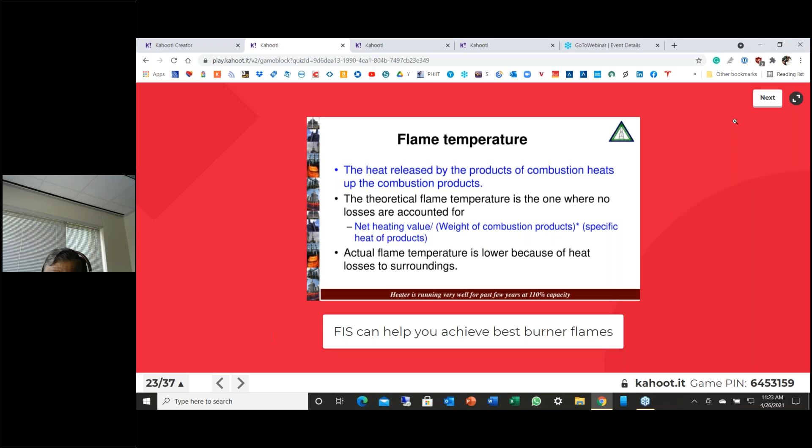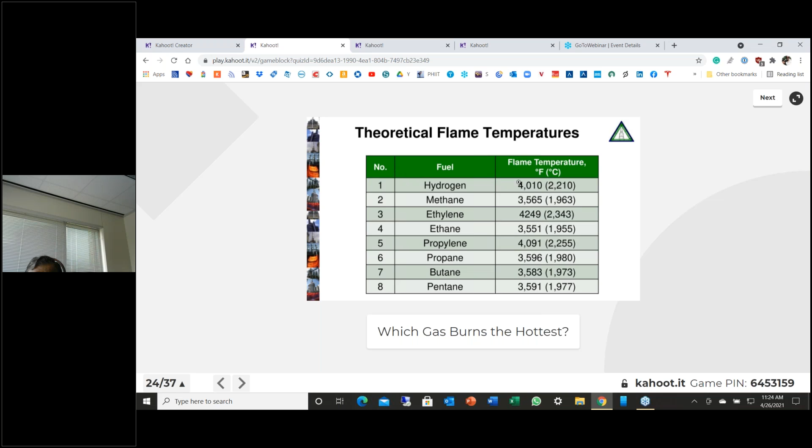So these are the theoretical flame temperatures, and you can see over here which gas burns the hottest. We have not listed carbon monoxide and acetylene, but they are among the gases which burn very hot. But as you can see, most of the flame temperatures are in the range of 3,500 to 4,000 degrees F. That's how hot the flames are.

What is flame? Flame is the visible part of the combustion reaction, and we have a mixture velocity of the fuel gas and air coming out of the burner tip. At the same time, we have the flame velocity, and when both match, we have the flames coming out - that's basically the shape of the flames. If you have a high velocity, the flames may lift up from the tip, or if you have a low velocity, the flames may start flashing back.

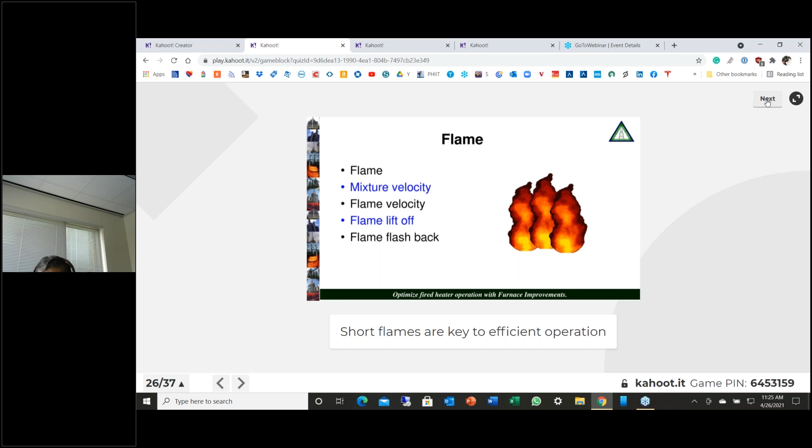Some people talk about the color of flames. I don't think that's very important - it basically depends on how the combustion process is taking place.

So here is a poll question for you: What is the thermal efficiency of your fired heater?

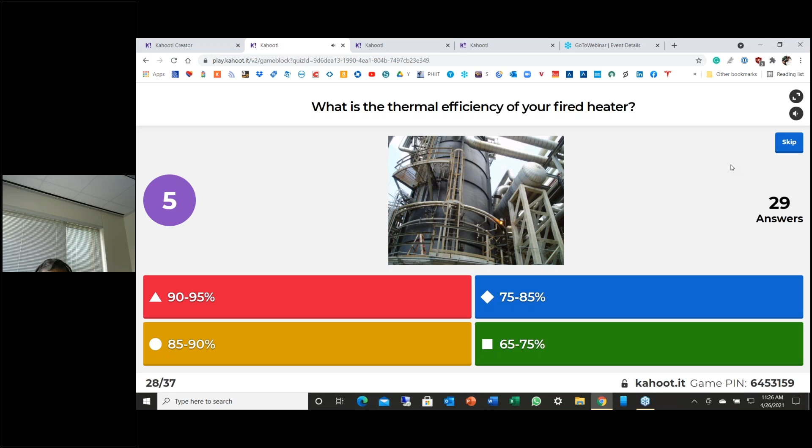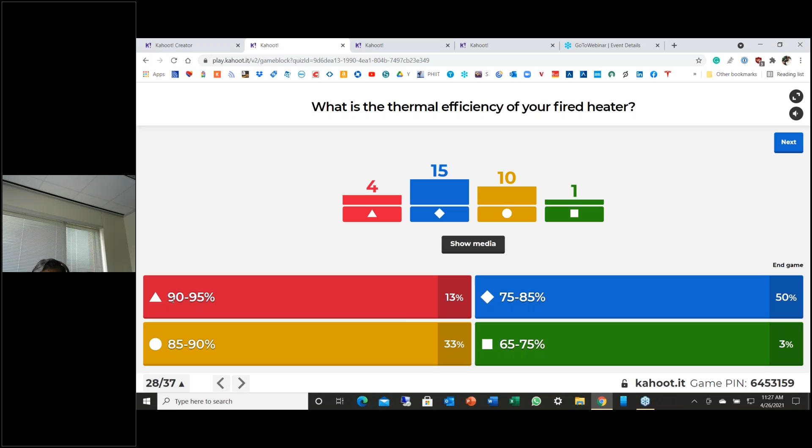Well, most of the fired heaters have efficiency between 75 to 85%, and some have even 85 to 90%, and there are maybe cracking furnaces which are in the 90 to 95% range, so a pretty good number.

In the 1960s, the thermal efficiency was pretty low for the heater, somewhere around 75% was considered good. Then as oil prices started going up, energy prices went up, and we had the first oil crisis and then the second oil crisis. Now we have kind of stabilized at about 94% efficiency. That's typically where we call it, it may go even higher, but I think that's what we're guessing.

So why don't we have a 100% efficient heater? The reason is we have heat loss through the flue gases, and every 35-degree reduction in flue gas temperature increases the efficiency by 1%. Similarly, every 15% reduction in excess air improves the efficiency by 1%.

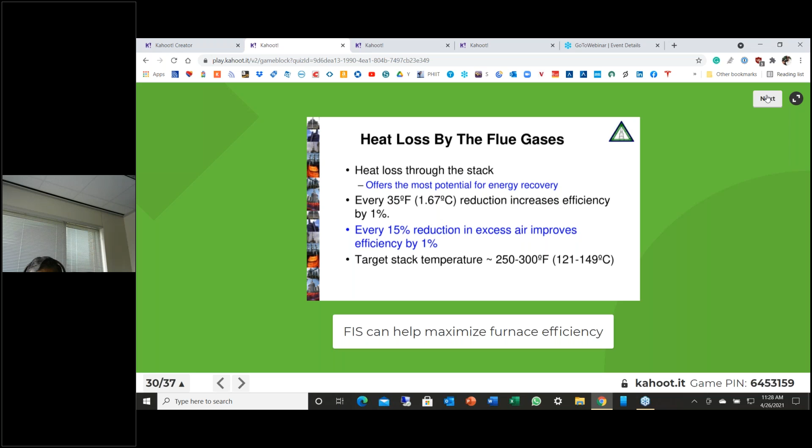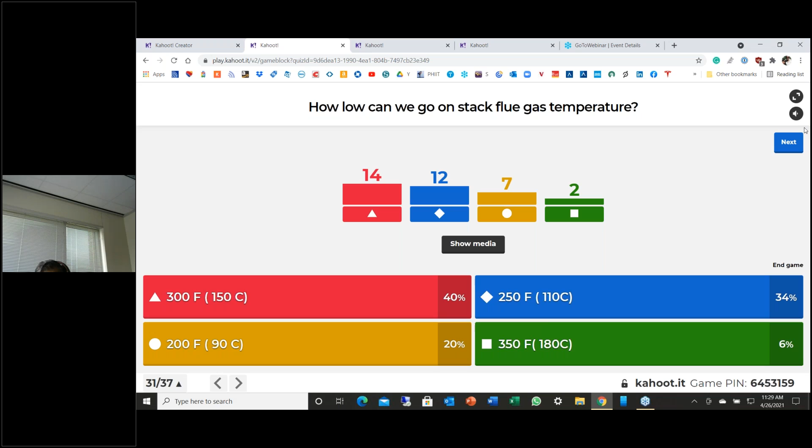So the stack temperature target, we can go around 250 to 300 degrees Fahrenheit. So how low can we go on stack flue gas temperature? We have the majority around 300 degrees. Some people have gone up to 250, some want to go to 200 degrees, let's see if we can be successful, or 350. So we have a wide range now.

This is where sulfur comes into action. If we don't have any sulfur in the fuel, then the water vapor in the flue gas will condense depending on the vapor pressure of the water, which could be anywhere 125 to 130, so we can cool up to 130 without this. But what happens is sulfur burns and forms sulfur dioxide, and some part of it gets converted into sulfur trioxide, which reacts with water to make sulfuric acid. The presence of sulfuric acid raises the acid dew point substantially, almost by 120 to 150 degrees. So once that happens, the sulfuric acid starts condensing and we have corrosion problems.

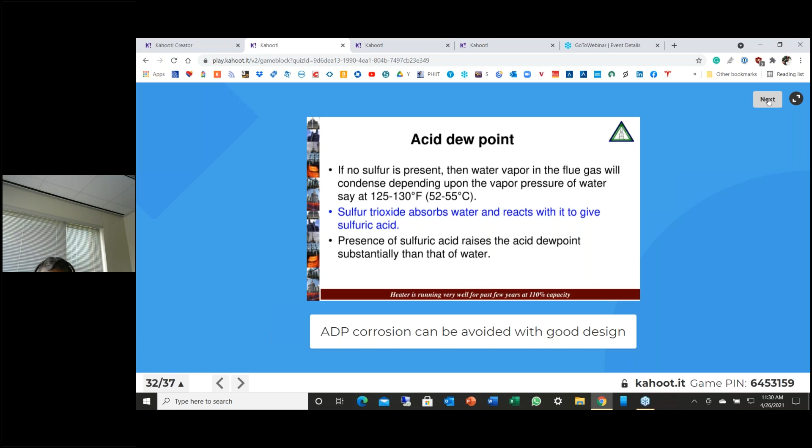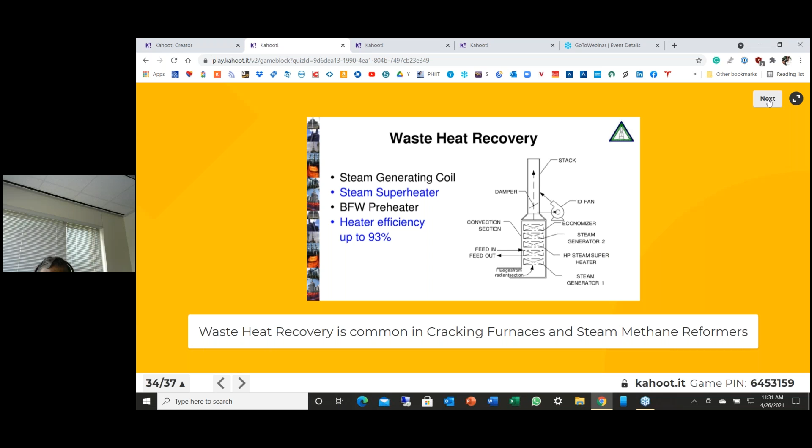The next topic is waste heat recovery, which is very common in cracking and steam methane reformers. So air preheating or steam waste heat recovery are the two ways of maximizing the efficiency.